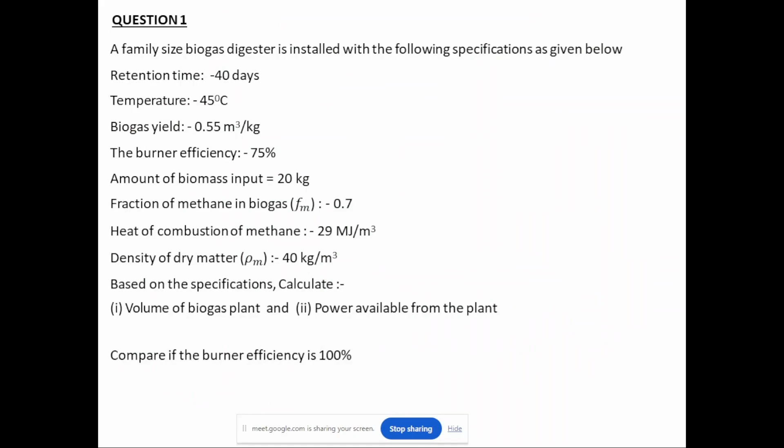The optimum temperature at which your biogas digester plant operates is approximately between 35 to 40 degrees Celsius, and at 35 degrees Celsius the amount of biogas generated will be maximum. One reason for this is basically the types of microorganisms that are grown and fed on the biomass.

These microorganisms usually work well only in this temperature range, and at 35 degrees Celsius the microbiological activity of the microorganism on your biomass will be at its maximum.

So that is the reason at 35 degrees Celsius the amount of biogas generated from your biomass will be maximum.

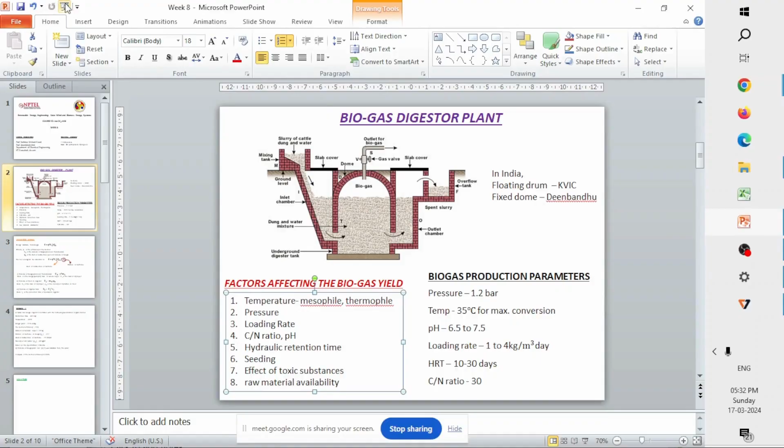Anaerobic is some kind of digestion or process that usually happens. It is related to the presence of oxygen. In case of anaerobic, it will be limited or no supply of air or oxygen, whereas in case of aerobic, it will be exact quantity of oxygen or in excess.

So here we finish with temperature. As I said, we will use mesophile and thermophile, two kinds of microorganisms whose classification depends upon temperature, to digest biomass into biogas, methane as well as carbon dioxide.

The second important factor affecting your biogas yield is the pressure. We have to optimize this. This is a table which suggests the optimized parameters for your biogas digester plant. Your pressure should approximately be maintained up to 1.2 bar so that there is proper functioning of the biogas plant.

What happens if excess pressure is there? If excess pressure occurs, it will create damage to your biogas system, because more pressure means your wall is subjected to more pressure from all sides. If pressure increases, there are chances of cracks, and it will also lead to release of gas from the slurry, causing gas leakage. That is why we need to optimize pressure up to 1.2 bars, which will be the optimized pressure to maintain. Both excess as well as low pressure will not be helpful for our biogas digesting process.

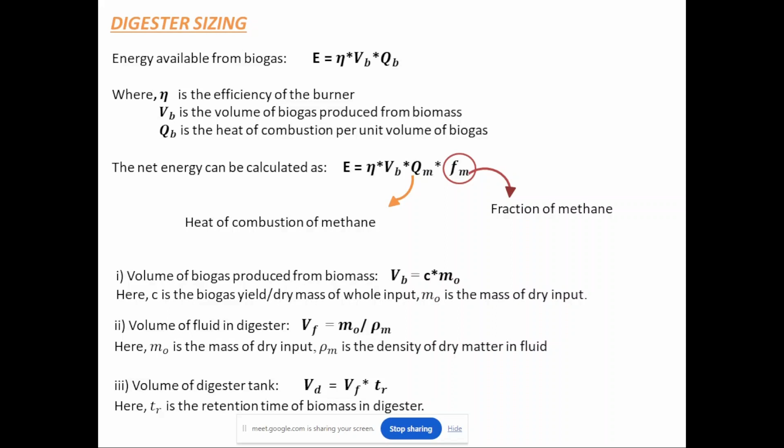Here we have a lot of different equations - the energy equations, the volume of the biogas, the volume of the fluid, and the volume of the digester tanks. These are the parameters which we are going to discuss now. If you have any doubts on the previous discussion on the factors, please ask me now.

Yeah, in case you have any doubt, you are welcome to ask me now. Okay, if there is no doubt, then we move on towards the digester sizing.

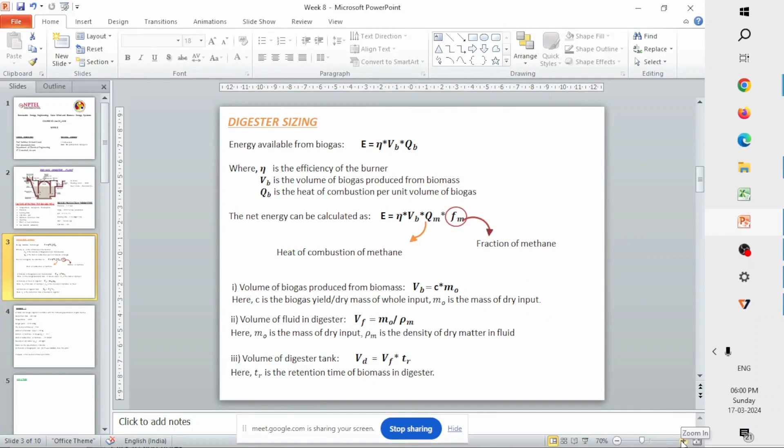What should be the size of my digester for feeding my biomass? First is how much amount of energy am I going to get from my biogas. I am using a biomass, feeding my biomass, digesting my biomass, and I am going to extract energy from my biomass. But how much amount of energy am I going to extract? That is what is given by this expression.

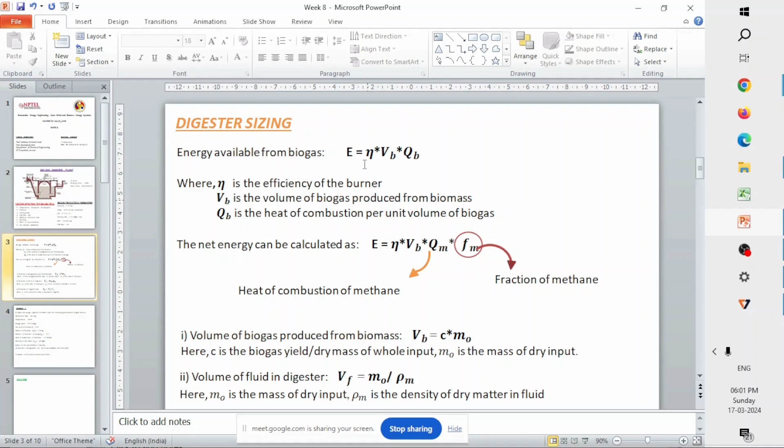E is equal to eta times VB times QB. Your eta here represents the burner efficiency - the efficiency with which the biogas is going to be generated, the efficiency of the burner. VB is the volume of the biogas produced from my biomass. As I said, not 100 percent of biomass gets converted to biogas, so there's a particular volume that gets generated. So what is the volume of biogas I'm going to get, and what is the heat of combustion per unit volume of my biogas, QB. So this is the energy available from the biogas.

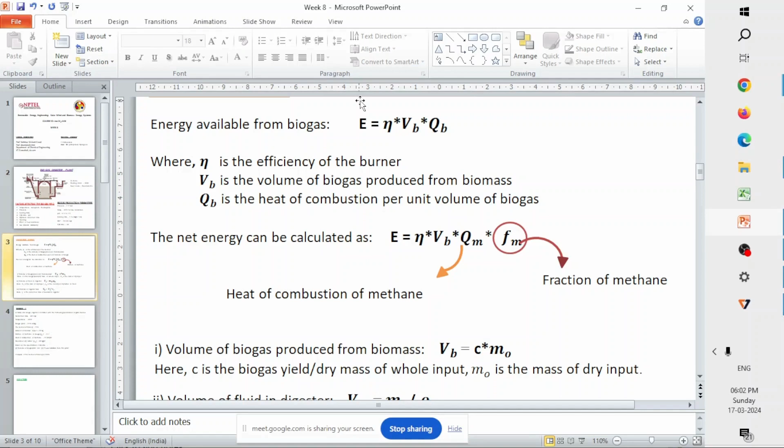But here we have another expression - the net energy is calculated as E equals eta times VB times QM times FM. The question is, why do I need this equation when I already have equation 1? What is the reason for going towards this equation?

The main reason is because of the methane. More methane is going to get generated, and that methane will be helpful for the combustion, or some amount of methane is used up in relation to the carbon dioxide generated. That is why we involve these two terms. QM is the heat of combustion of methane, and that value is approximately 28 to 29 megajoules per meter cube.

So you can see how much amount of heat, how high is the heat of combustion of methane. 29 megajoules, that is 29 into 10 power 6 joules per meter cube. That's a very high heat of combustion.

Methane has a high heat of combustion, and FM is nothing but the fraction of methane that is going to be generated. As I said, biogas is not comprised only of methane, but also includes carbon dioxide. So you have to involve the fraction of methane that is getting generated in the biogas. VB is nothing but the volume of biogas produced by your biomass.

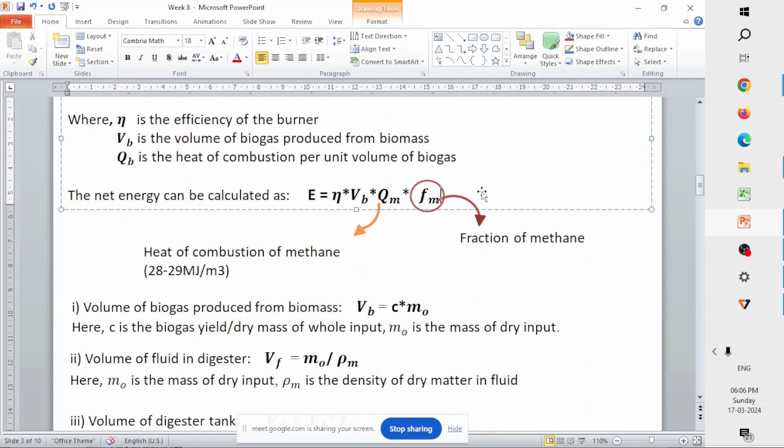So these are the four equations, and we will specifically be using in this session equation number 2, equation number 3, equation number 4, and equation number 5. These four equations we will be using today to solve approximately 5 or 6 questions that we have.

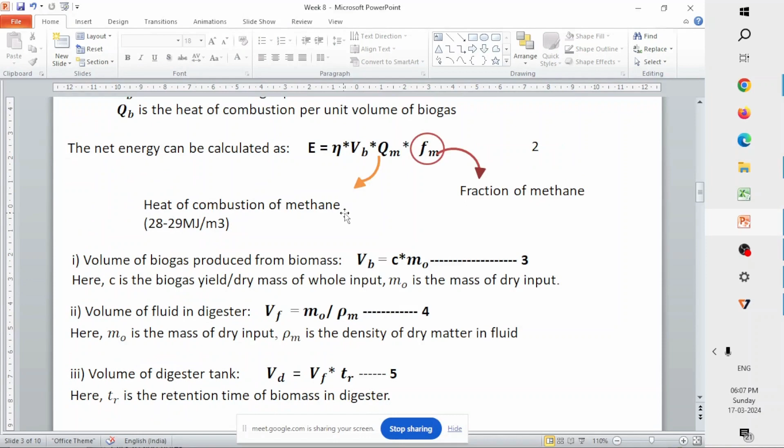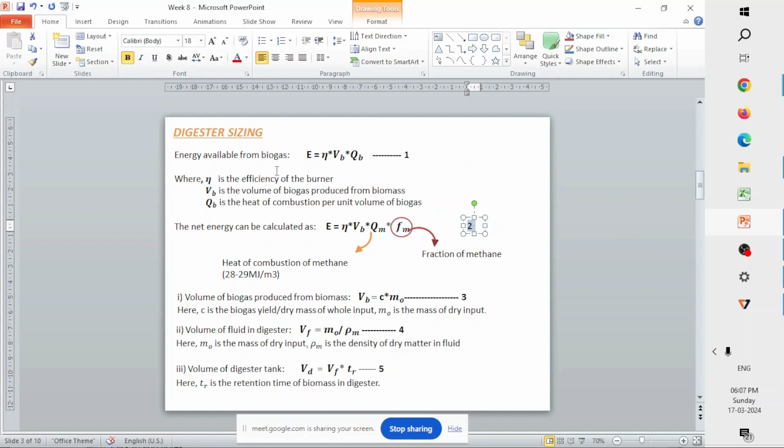So let's just move on towards questions. These are the four equations: equation number 2, 3, 4 and 5. If you want, you can take them down in your notebook also, because we will be using these equations to solve our numerical problems in the lecture ahead. So this is our first question.

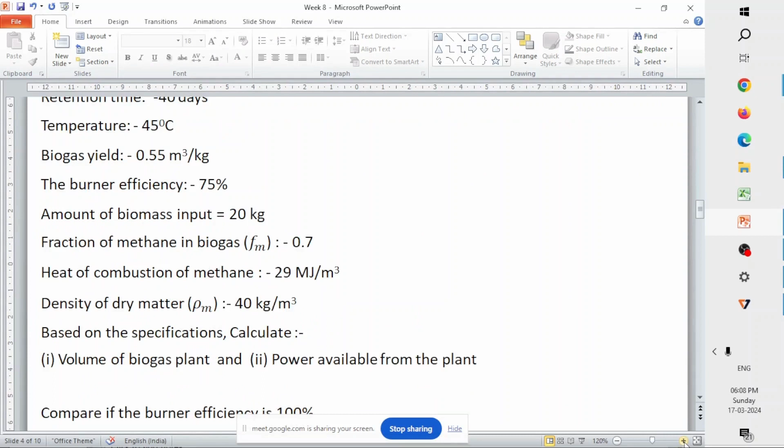Let me zoom in, this is a very simple question also. Let me read out the question completely. We have a family sized biogas digester that is getting installed, and here our specifications are given. The retention time is given as 40 days. Temperature at which the digestion process is going to happen is 45 degrees Celsius. The biogas yield, that is your C value, is nothing but 0.55.

What this actually means is, as I said previously, for 1 kg of dry matter that I am going to feed to my digester, I am going to get 0.55 meter cube of biogas. So 0.55 meter cube of biogas is generated from 1 kg of biomass fed to the digester system.

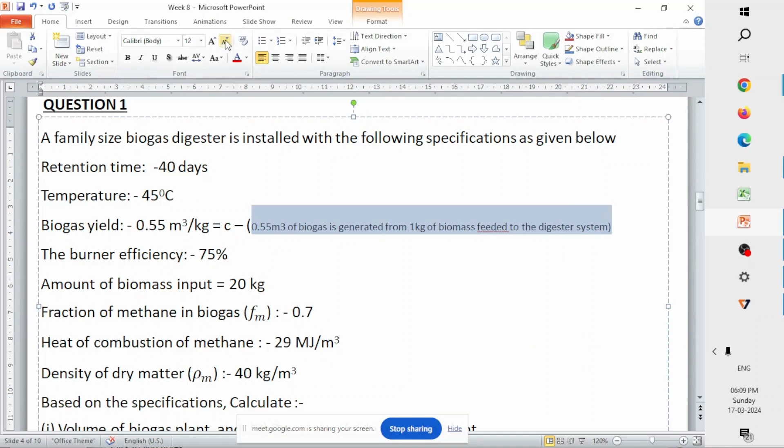Let me keep it visible. The burner efficiency is given as 75%. The amount of biomass that is going to be fed in is 20 kgs, as written here, that is the amount of biomass I am going to feed into the system.

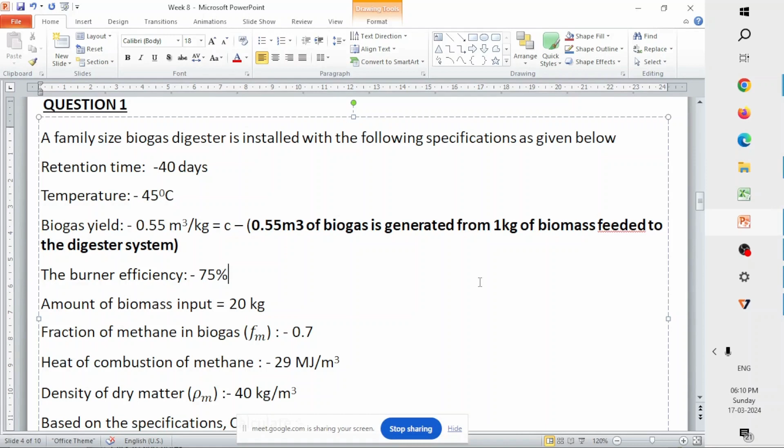With this, now you can calculate the biogas yield. For 1 kg I am going to get 0.55 meter cube. For 20 kgs, how much will I be getting? It's just simple math. From that amount of biogas, the methane I am going to get is only 0.7, that is 70% of whatever biogas is generated will be my methane, that is the fm value.

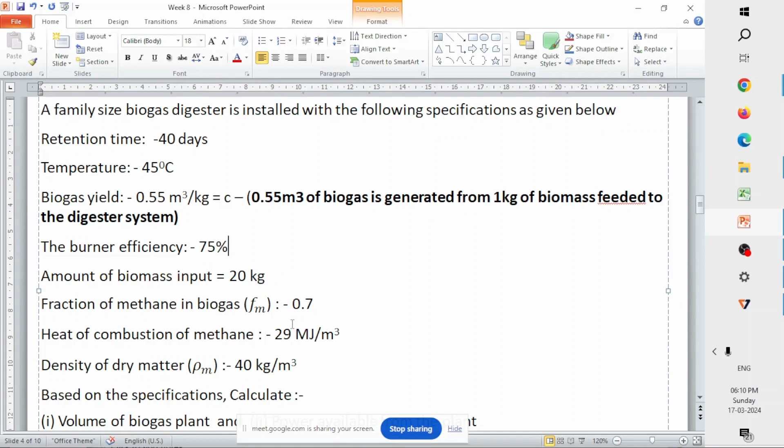The next one is the heat of combustion of methane. So the methane is going to combust, that will be 29 megajoules per meter cube. The density of the biomass feed of the dry matter is 40 kg per meter cube.

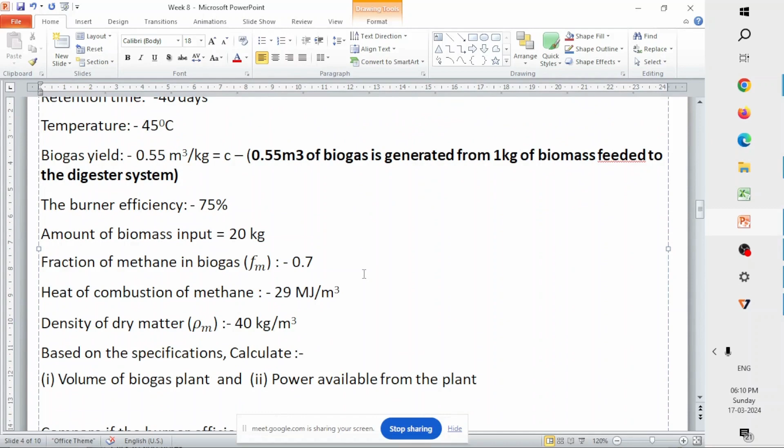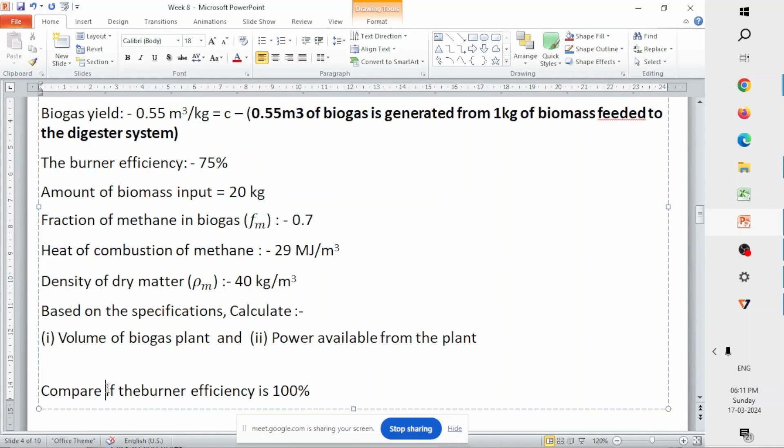So based on these specifications given above, calculate the volume of the biogas plant and power available from the plant, and compare the power if the burner efficiency is 100%.

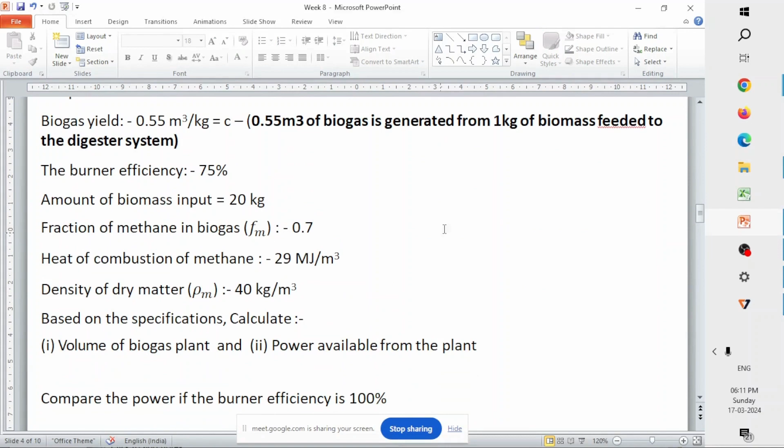So this is the question in front of us, and we are asked to calculate two things: volume of the biogas plant and the power available from the plant. Let me give you some time to solve or come up with the equations we have to apply. Those are the only 4 equations if you see in the previous slide, but how to apply them - I request you to first try it yourself before we solve it in the next 1 or 2 minutes.

Okay, I'm sorry, I'll just keep the slide.

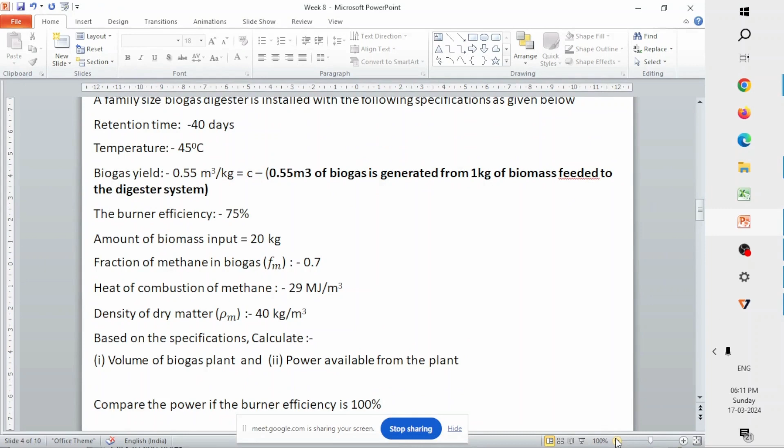So this is your question, and almost all the data is given. You are supposed to use those 4 equations - equation number 2, equation number 3, equation number 4 and equation number 5 - and calculate the volume of biogas and the power available from the plant, what amount of power is going to get generated from the biogas.

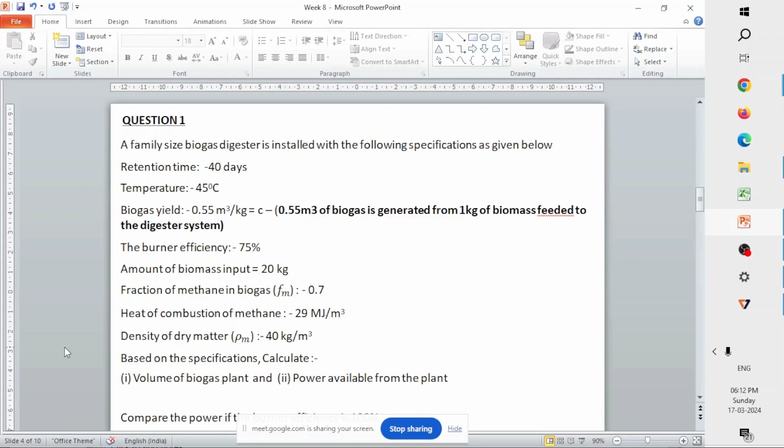So what do you think? What should we start with, or how should we start with? Any ideas on how we are supposed to start?

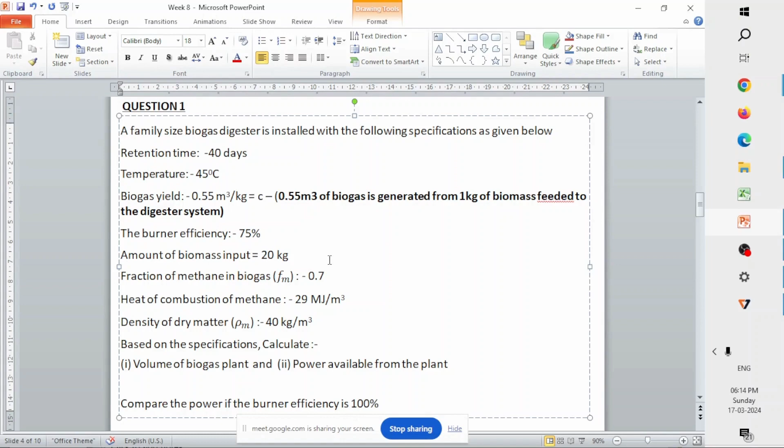Okay, let's now solve the question. Please interrupt me in between if you are unable to understand how I am approaching the problem. First let's see how you calculate the fluid volume, or volume of fluid, in the digester.

The formula for volume of the fluid in the digester is nothing but m naught by rho m. m naught is the amount of mass input, and rho m is the density of the dry matter that you are going to feed into the system. So Vf, the volume of fluid in the digester, equals m naught, the amount of biomass fed into your digester plant, divided by rho m, the density of your dry matter.

The amount of mass fed into the system, m naught, is 20 kg per day, and rho m, the density of the dry matter, is 40, with units kg per meter cube. For unit dimension analysis, I'll keep it in a separate column - numerical values in one place and units in another, so it will be easy for you to understand.

So this value will be, if you can tell me, then it would be great, or let's just calculate. So 0.55 times 20 is 11, and here your kg in the denominator will get cancelled, so it will be 11 meter cube per day.

So you know the volume of the biogas. Now you need to calculate what will be the power that will get generated from your biogas plant. So E, or you can even keep P because it's power, so it will be easy to understand. That is nothing but eta, your burner efficiency, times Qm. Qm is your heat of combustion of methane. Fm is nothing but the fraction of methane present in your biogas, times Vb. Vb is nothing but the volume of your biogas that gets generated.

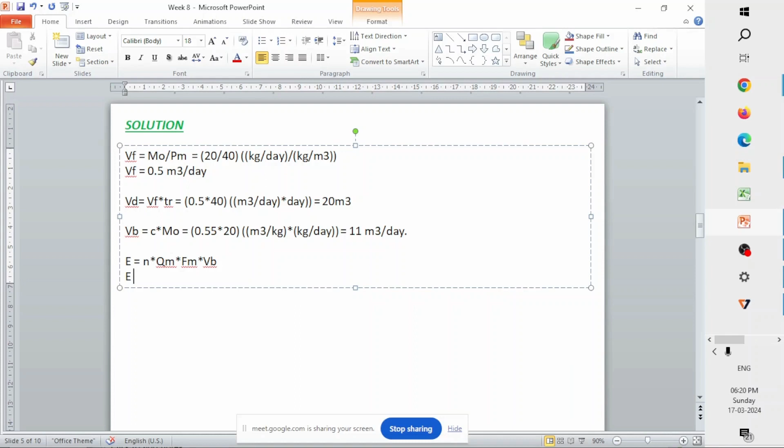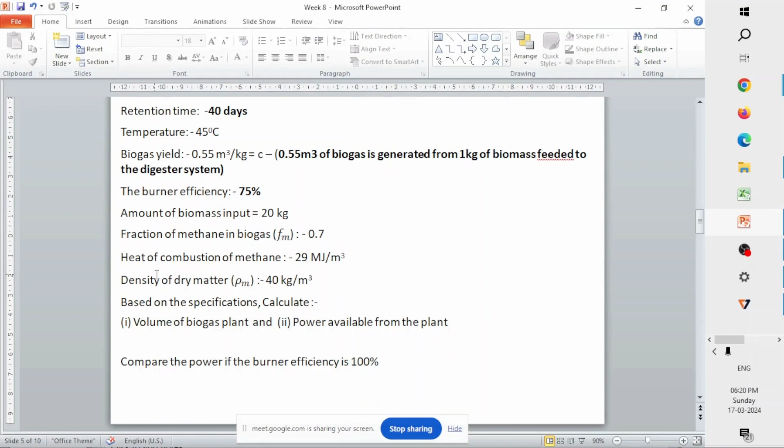So your burner efficiency is 75%, as written here. If you convert that into a fraction, it would be 0.75. Qm, the heat of combustion of methane, is 29 megajoules per meter cube. Let me keep this initially in the same units as megajoules. Fm is the fraction of methane in the biogas, that is 0.7, and volume of the biogas that gets generated is 11.

So the power that can be harnessed or available from the biogas plant will be 0.75 times 29 times 0.7 times 11, which is 167.475, but I have not given the units yet.

Vb, so here units will be only for Qm and Vb. Qm is megajoules per meter cube, and VB, the volume of the biogas, will be meter cube per day. So this will be megajoule per day, because that meter cube and meter cube will get cancelled. So this is in megajoules per day unit.

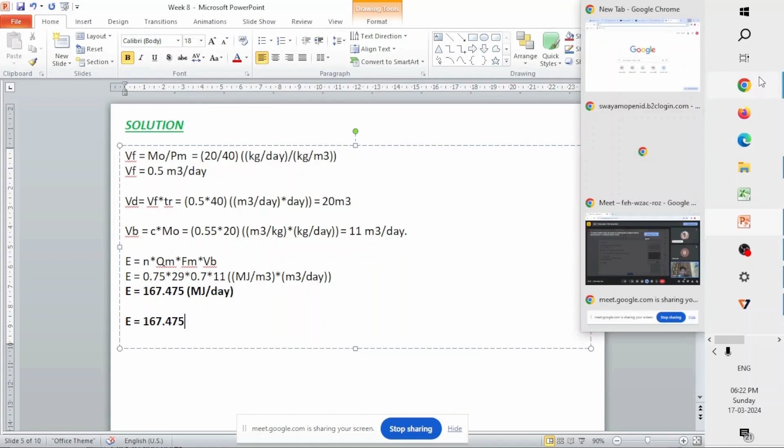So this will be the amount of power that can be delivered from the biogas plant in megajoules per day units. Suppose if you want to convert it into SI units, then you are supposed to calculate, converting megajoule to joule and day to seconds. So how many joules are present in 1 megajoule? Can anybody tell? How many joules are present in 1 megajoule, like 1 megajoule is how many joules?

10 power 6, I think. Yeah, it's 10 power 6. So this will be in joules. I'll write that on the side. And we are supposed to convert this, since it's per day, into per second. So we are supposed to divide this. In a day we have 24 hours and each hour has totally 3600 seconds. So if you divide the numerator by 24 into 3600, you will be getting the units in joules per second.

So what will be the answer? You can calculate and let me know what will be the power that gets delivered from your biogas plant.

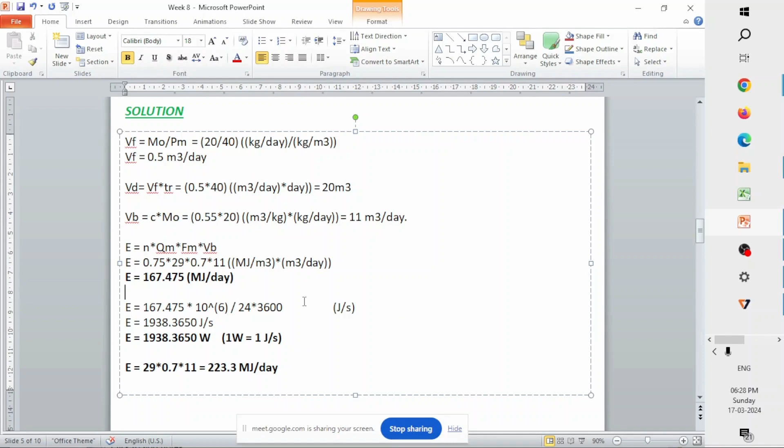So this is kind of a comparison to show how the burner, or how various parameters, can affect the amount of heat that you actually gain from the biogas system.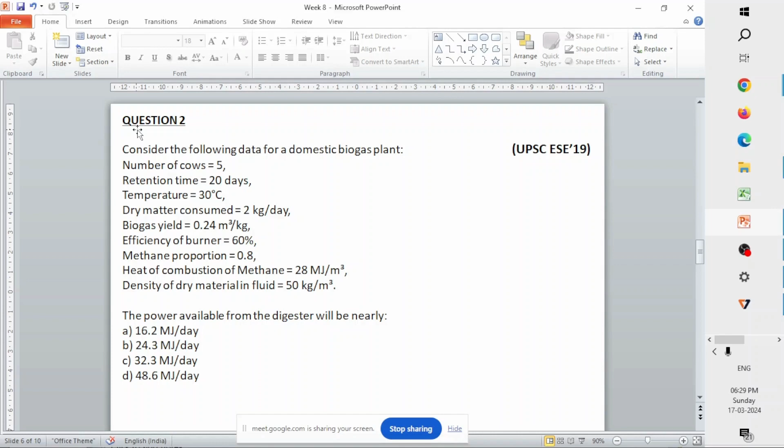I hope the question is also visible. Let me zoom in so that you can see the data clearly.

Same question, similar pattern, nothing much to change. Over there you were even asked to calculate the volume of biogas. Here the question does not ask you to calculate that also. It's just that we need to calculate the power available from the digester. Of course, in order to calculate your power, you need the value of VB, so within the process of calculation, you will be calculating that as well. So what will be the answer?

Similar approach, nothing much different here. A very small change, that's all. Nothing big or nothing different.

A very small change in the question. The only thing that is going to be different is your m naught value. So I am giving you that hint. What is going to be different? Your m naught will be different. I mean, you have to calculate your m naught here. It's not straightforward.

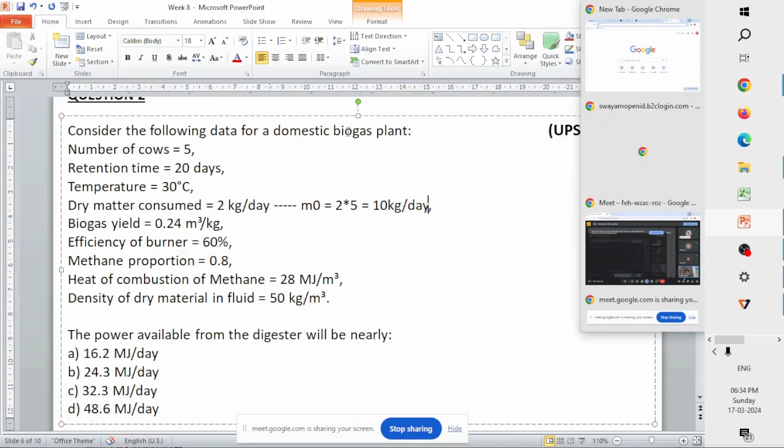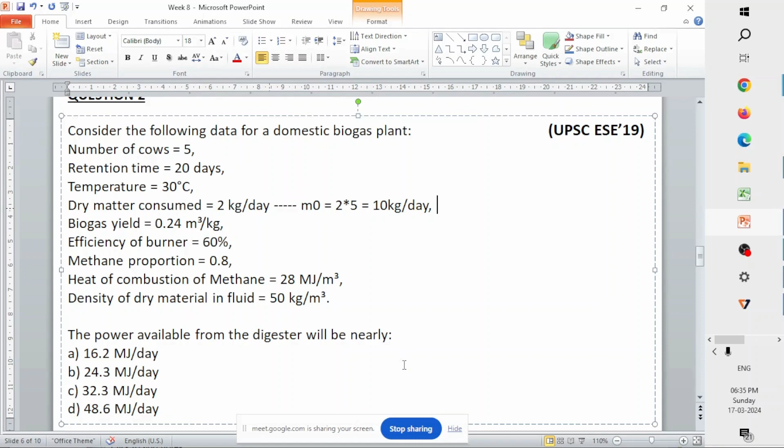So what is your value of m naught? m naught is 10. And rho m is 50 kg per meter cube. So your VF is m naught by rho m, that will be 10 by 50, which is 0.2.

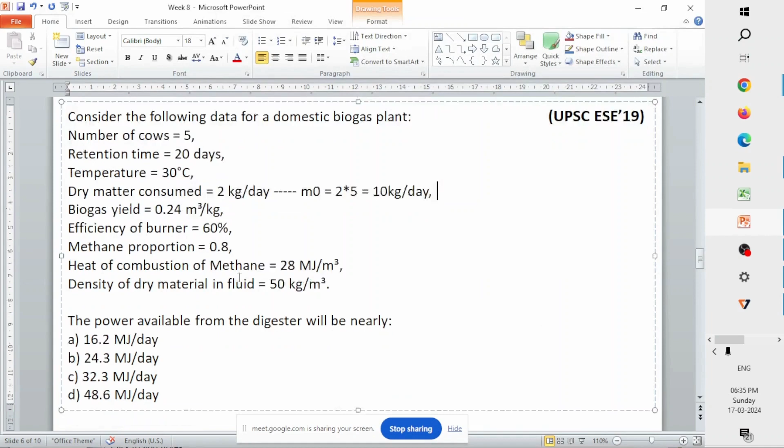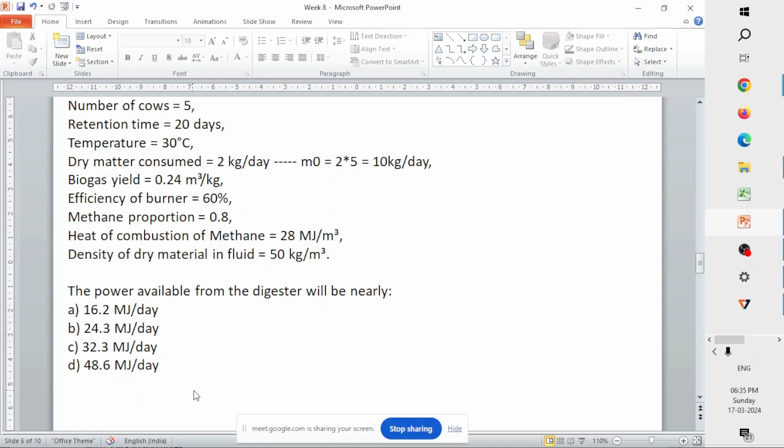So VF will be 0.2. Honestly, you don't need to calculate VF and VD, because we are not asked to calculate the volume of the fluid in the digester or volume of the digester. So you can even start your calculation from the volume of biogas itself, but it's just for practice purpose we are solving volume of the digester also here. Meanwhile if you are calculating, let me know the answer, or you can type it in chat box.

So VF is nothing but m naught by rho m. Here m naught is 2 kg per day, but this is only for one single cow. But we have totally 5 cows. So the total amount of dry matter that is going to get generated will be 2 times 5, so 10 kg per day of dry matter will be generated from all the 5 cows.

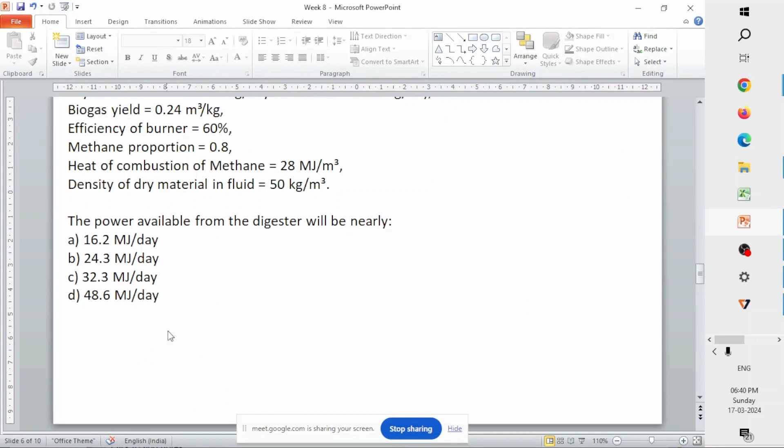So 0.6 times heat of combustion of methane is 28, here it is given. I am going to keep it in megajoule units itself, since the options here are in terms of megajoules. Fm, that is the fraction of methane, is 0.8, times Vb, that is 2.4. So can you tell me what answer you will get if you multiply all these 4 terms?

Sir, 32.256. Okay, yeah, correct. So megajoules per day, the units will be in day, and since here our options are also there in megajoule per day, so the option is C.

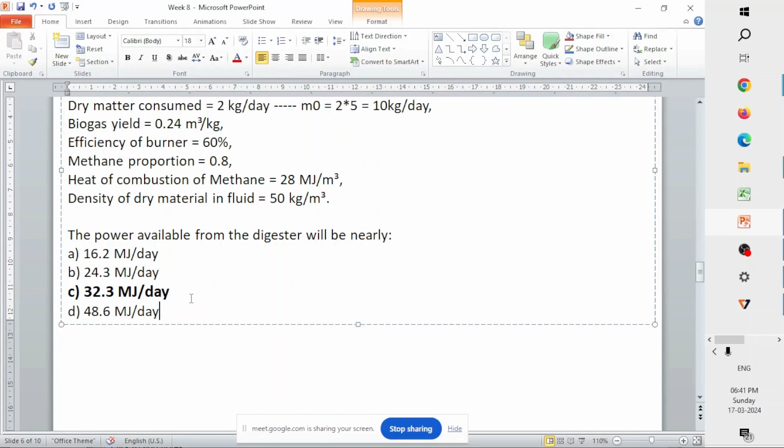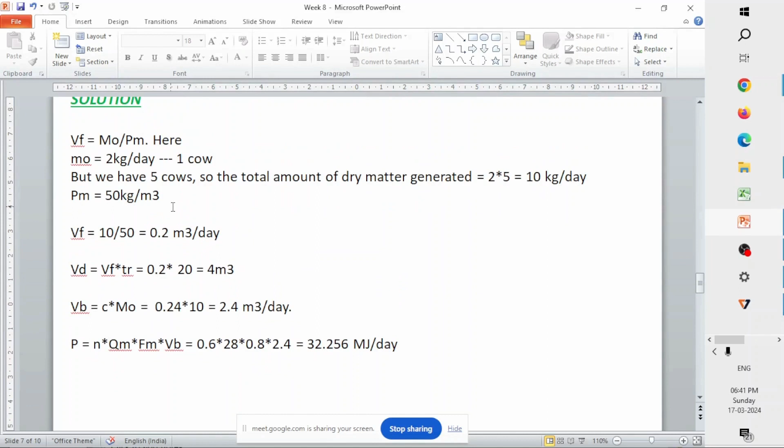32.3 megajoules per day. This question was asked in the UPSC civil service exam, ESE branch, in 2019. That's just additional information — you can also check previous papers, and if you get similar questions, you are always welcome to solve those.

So why do we keep it 10% more? It's a kind of provision that we give to the digester for the biogas accumulation. The biogas that's going to get generated — we provide a certain amount of space for it to be stored. So this 10% of the volume of your digester will be allocated for biogas storing or accumulation.

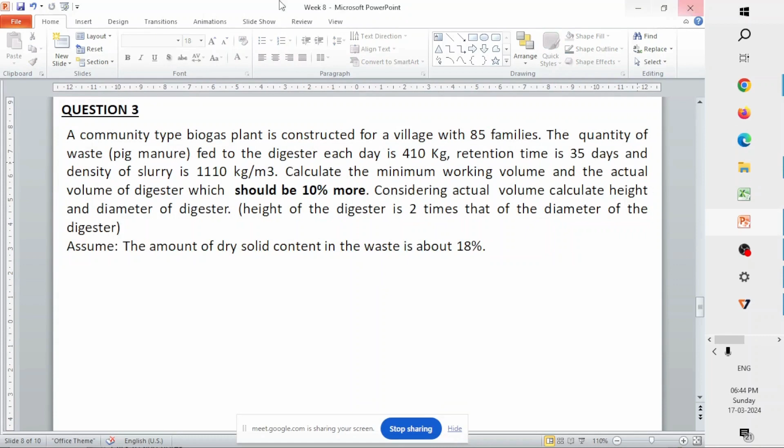Quantity of the waste, the pig manure fed into the digester, is 410 kg per day. This is nothing but you can keep it as m naught. Now, there is one particular condition: whatever you take as your manure or slurry, whatever waste you take, you have to add an equal amount of water to it in order to make your slurry.

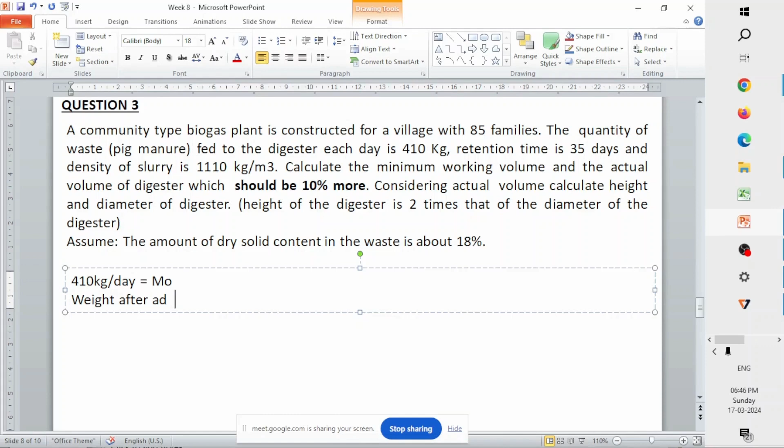So if we add equal volume, that is again 410 kgs. So the total weight after addition of water will be 410 times 2, because 410 is already present — this is nothing but your dry matter weight — and you're going to add an equal quantity of water, so that's another 410. So 410 from dry matter or pig waste plus another 410 from water, giving a total of 820 kg per day.

So you know the weight, and you have to calculate the volume of the digester. That will be this divided by density, which will give you the volume. It will be nothing but 820 divided by 1110, that is your density, right? So let's calculate that.

0.7387 — what will be the units? Meter cube per day, because 820 is kg per day and this is kg per meter cube. So the volume of the waste that is going to be in your digester will be 0.7387 meter cube per day. This is for one day.

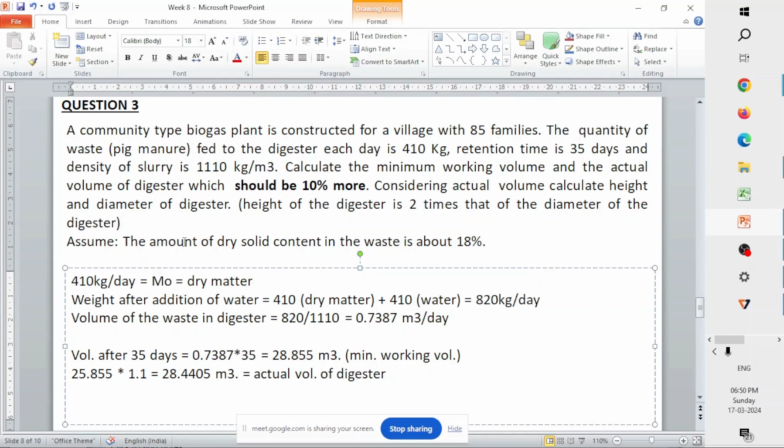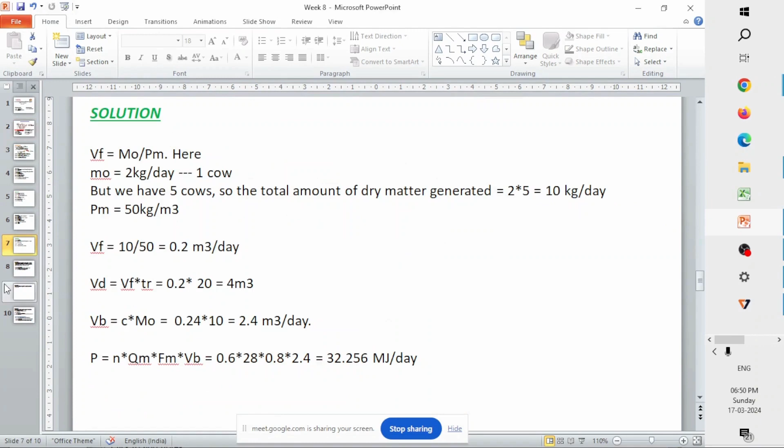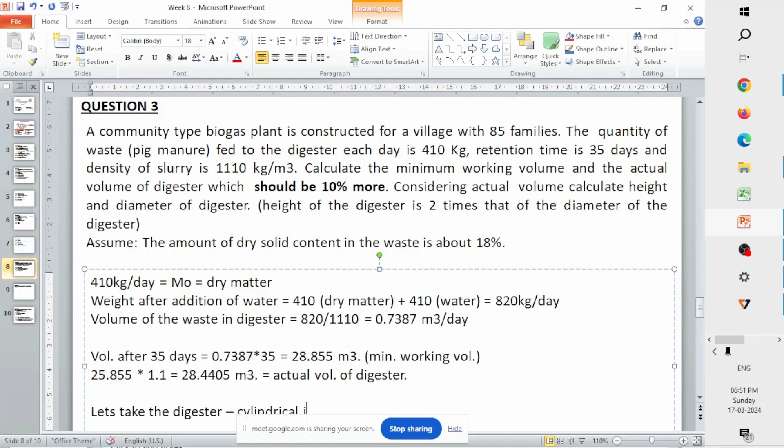So what is the volume of a cylinder? It is either pi, that I am writing as 3.14, pi r square h, or pi d square h by 4, right? So pi d.

Here, since it's already given that your height of the digester is 2 times that of the diameter of the digester, so h will be nothing but 2 times of d. That's what it means: your height is going to be 2 times that of the diameter of your digester.

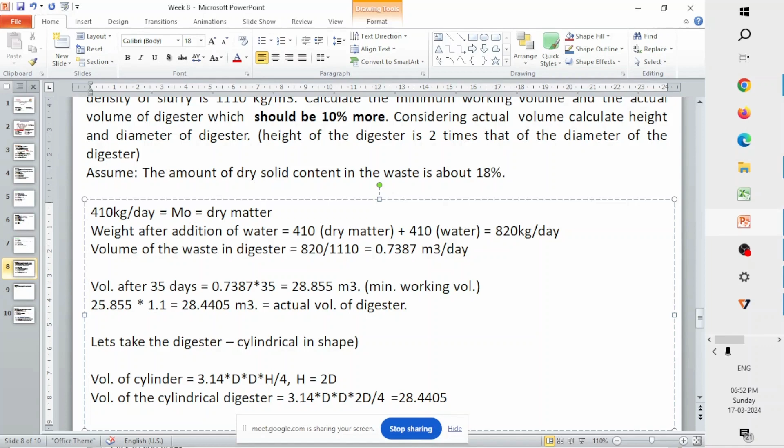So if you substitute h is equal to 2d here, then you will be getting the volume of the cylindrical digester, and this volume of the cylindrical digester is nothing but the actual volume of your digester. So that will be 28.4405 meter cube. From here you can calculate the value of d.

So what is the value of d actually you are getting? This will be your diameter of the cylindrical digester that we are going to use for our process. So let's just calculate that: 28.4405 times 2, the whole divided by 3.14, whole power 1 by 3.

18.1111, right? 18.11. It would be approximately 2.6260 meter. Diameter will be 2.620 meter. I hope this is the same answer you are also getting. And h will be nothing but 2 times of this diameter, so 2 times of 2.620, that will be 5.24 meter. So this is the diameter of your digester and this is the height of the digester.

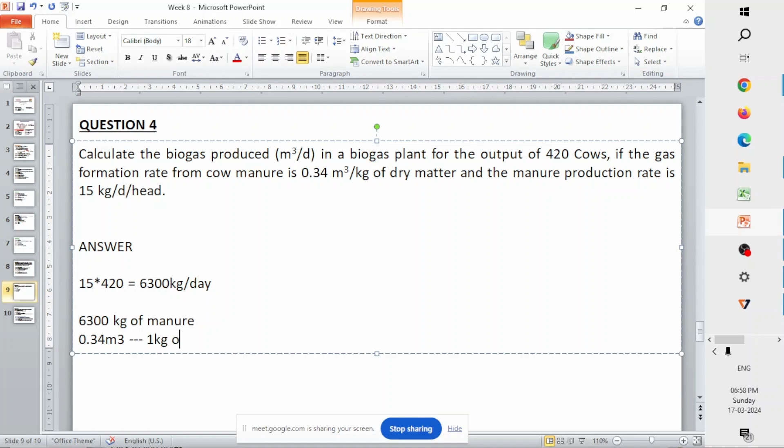And here it is written that the gas formation rate is 0.34 meter cube per kg of dry matter. So what that means is 0.34 meter cube will be generated for 1 kg of my manure, right?

So for 1 kg of my manure I am going to get 0.34 meter cube. I have 6,300 kg of manure. So how much amount of biogas am I going to extract from this manure? That is nothing but 0.34 times 6,300, which gives 2142 meter cube of biogas. Since the entire calculation is for one particular day, the answer will be 2142 meter cube per day.

Here we have to multiply, not divide. This is not density - density's unit would be kg per meter cube. This is meter cube per kg of dry matter. Either way you can understand it, but logically speaking, this is the solution: for 1 kg of my manure or dry matter, I am going to get 0.34 meter cube of biogas.

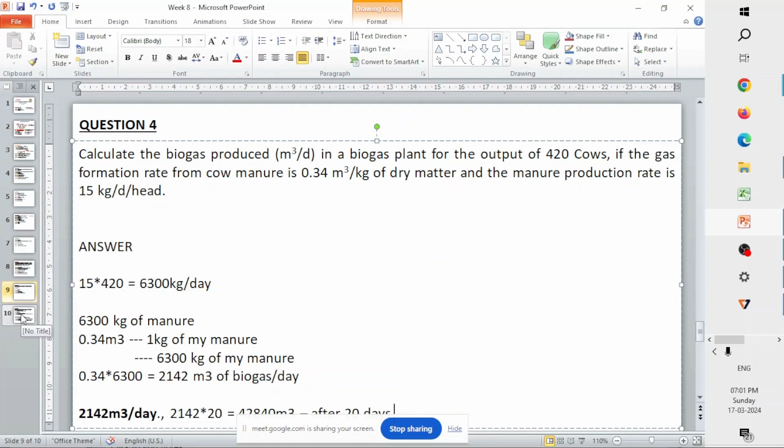So let's come to our final and last question. Actually this is a quite lengthy problem, but let's solve it anyway. Here we have an engine generator that has to be powered using a biogas plant, and the total power requirement for that engine generator is 2560 watts per day. We are asked to calculate the volume of the digester unit if rice husk is used as the biomass material. The calorific value is given in kilocal, so you need to convert that to kilojoule, and then find the volume of the digester unit.

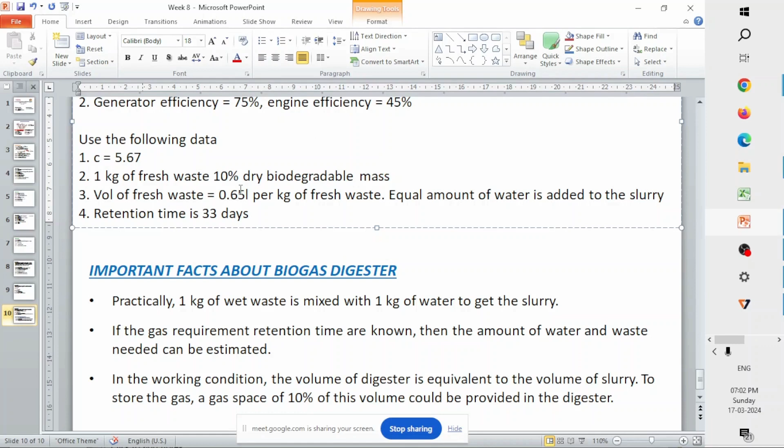So we are given certain data. The value of C, which is how much biogas is generated per unit of dry matter that I am going to use, is 5.67. In 1 kg of the fresh waste I have approximately 10% of dry biodegradable mass, and the volume of the fresh waste gives approximately 0.65 liters of biogas. An equal amount of water is added to the slurry, and retention time is given as 33 days.

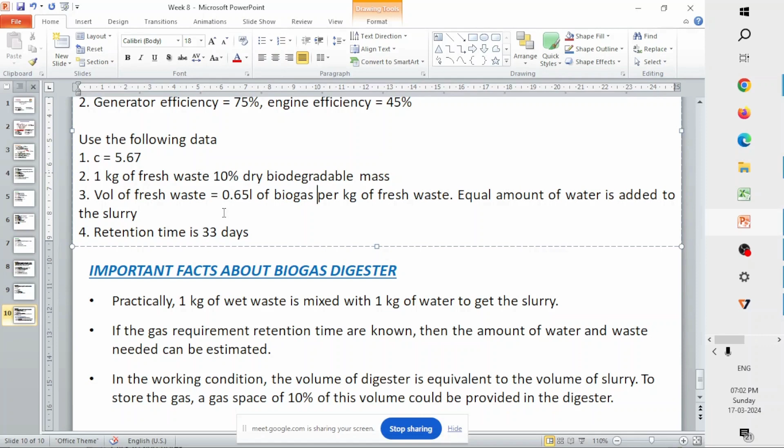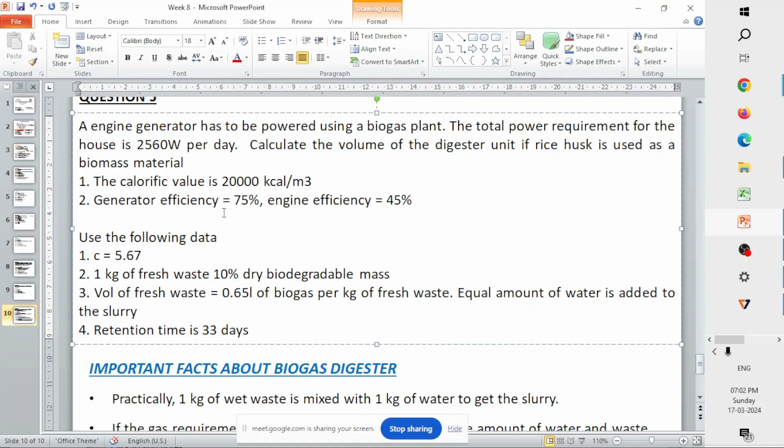So this is the question. Here we are having fresh waste. Previously all our calculations were for dry waste, but here our waste is fresh waste. So in that case, how are we going to solve this? That is the question that we have, so let's just solve this.

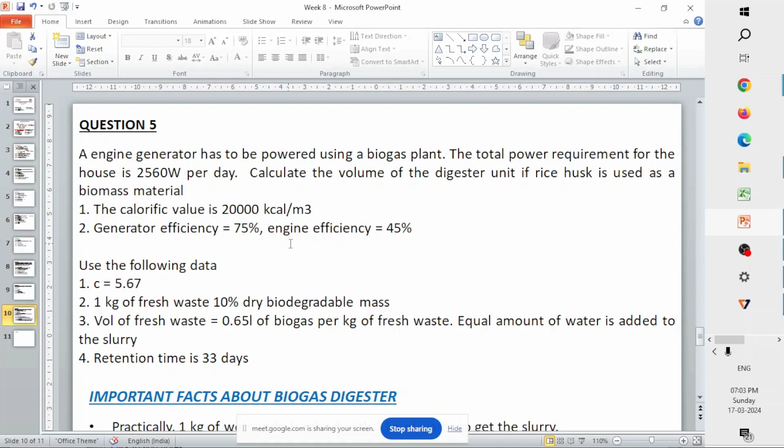So we are supposed to generate 2560 watts - that is the power requirement. But unfortunately, the engine generator I am using is not 100% efficient. The generator efficiency is 75% and the engine efficiency is only 45%. So how much power should be input so that at the end I get this much power as the output? That is what we are supposed to identify first - this is the output power I want.

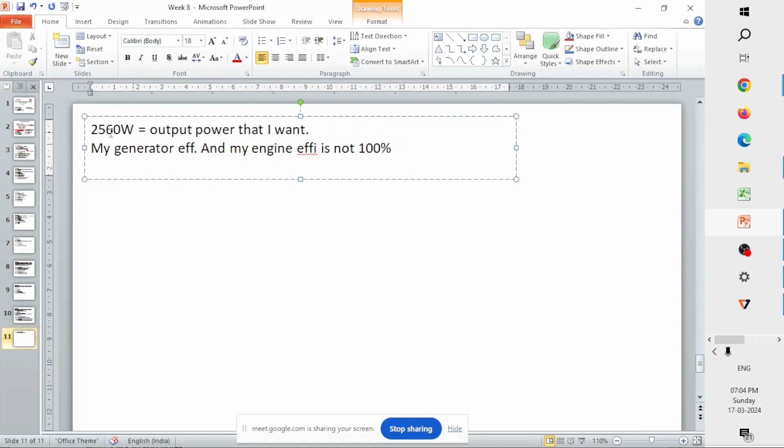So my generator efficiency and my engine efficiency are not 100%. If it was 100%, the input power would also be the same as 2560 watts. But since it's not the same, it has certain values. So how much input power do I have to give?

Because this input power is nothing but the amount of power that we will get from the biogas, because this biogas is what is going to run the generator and supply the power to us. So if I have to get this much amount of power, what will be the power that has to be fed to my electrical generator before? So input power to my generator times the generator efficiency, I guess that is 0.75.

And my engine efficiency 0.45. After this much amount of my input power is lost, whatever power is left is the output power, and we know the output power as 2560 watts.

So if we know this, then we can calculate the input power, right? So input power will be 2560 divided by 0.75 times 0.45. That would be approximately 7585.1851 watts.

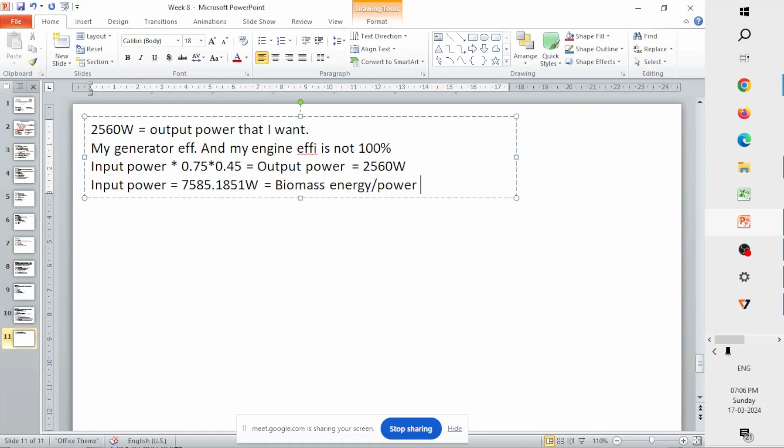So if my biomass has to generate this much amount of power, how much biogas do I require? Biogas has to supply 7585.1851 watts power to my generator. If this is the case, then how much biogas will I require for supplying this much energy, right?

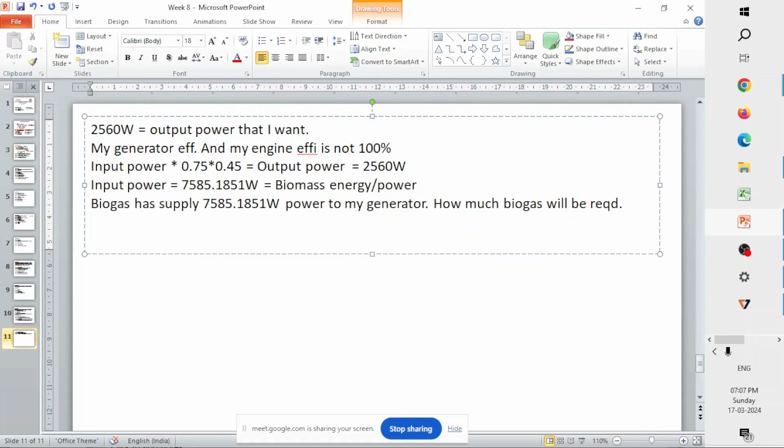Now we are supposed to calculate the biogas volume. We know the calorific value of power. Biogas volume will be equal to input power, that is 7585.1851 divided by 20,000 times 4.18. So this value will be... it's 20,000. So, let's say, since this value is extremely small, let's take it as 20 kilocal and then solve.

So I am taking here 20 kilocal or 20,000 calories, so that we can eliminate the power, like it's coming in 10 power minus 5, right? So we can eliminate that out. So 0.0907 will be our biogas volume, meter cube per second. The volumetric flow rate will be this much amount of biogas generated.